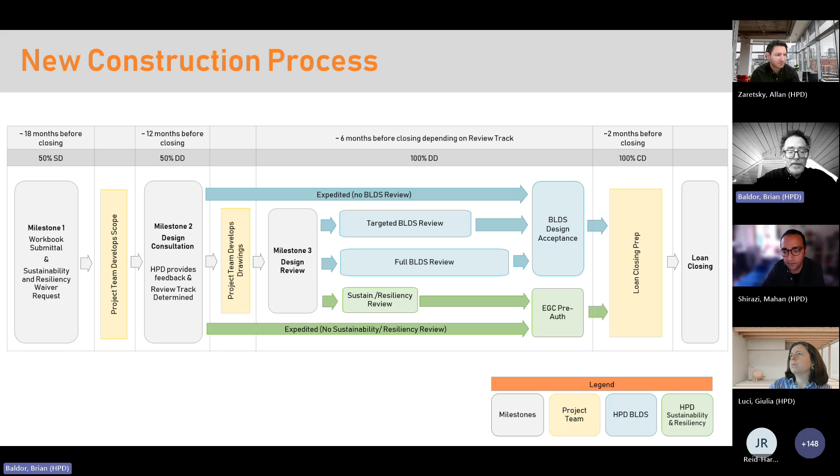The design consultation, again, as I mentioned, is around 12 months before closing - that's when you would be submitting for the design consultation. The submissions use a separate design consultation checklist. We do require a consultation. That process does also involve pre-ULURP.

So just wanted to flag that if your project happens to be on city-owned property and is doing ULURP, it may be a little bit earlier. Regardless, it's the same checklist. Then during the consultation, the entire development team would be present.

That is to say, representation from ownership, architecture, engineering if necessary, along with BLDS architecture, engineering, sustainability, resiliency, and of course program. So we look at the project, we talk through it, make sure that the goals are aligned and the project is progressing in a good direction. Then after the design consultation, the document that has been reviewed for the consultation is shared back with all members present.

After which, focusing specifically on BLDS and our design review, there are three possible review tracks. One of them is the design review track, where after the consultation is complete, a separate intake is created.

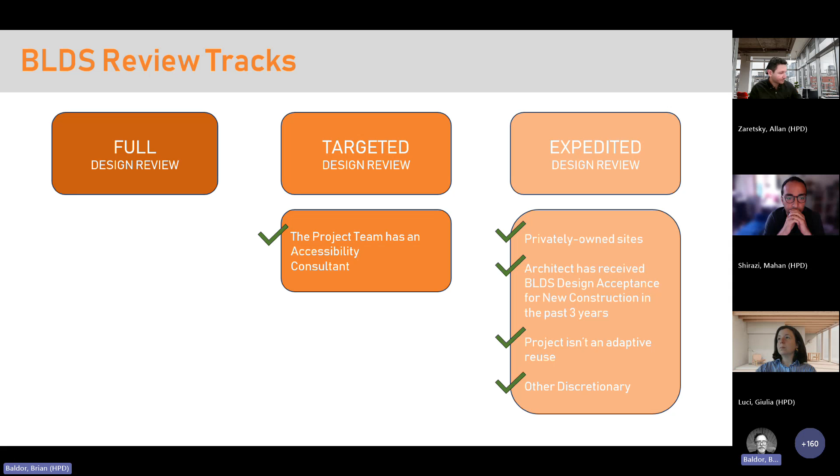Another important tool as part of our updated process is the project summary worksheet. In the past, if you haven't done a project since September, you would be familiar with our PDF summary at the beginning of the documents. We have created an Excel spreadsheet that captures much more of the data about the project. Very useful tool - it includes information that's useful to all of our teams, and we will look at this in more depth in just a moment with some of those teams.

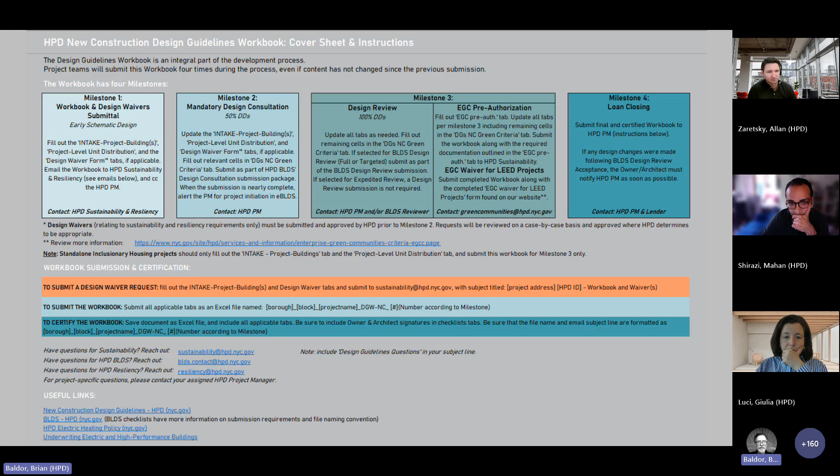I'll turn it over to my colleague Mahan Shirazi to talk about the design requirement updates in this version of the guidelines.

Thank you, Brian. So for those who are familiar with the older version that we published a few years ago, the design requirement aspect of this new guideline is very limited. The scope of the change is quite minimal in terms of the BLDS review. My colleagues at Sustainability and Resiliency will go through the changes in their sections, which are, I think, the majority of the updates. But in terms of design, I'll just say that if we are halfway through May, this will sort of allow a transition period for projects to determine whether they would go through version 1 or 2 of the guidelines.

Presumably, if you're here and working on a project, it's unlikely you'd be supposed to close by June 30, but if it is, then that would be the exemption. Otherwise, projects closing after June 30 will be subject to version 2 of the guidelines.

Maybe one organizational change, an update in the guideline, is that we rearranged the chapters and sections, partly to improve the clarity of the guidelines and also to be aligned and consistent with the preservation design guidelines, which were previously published as well.

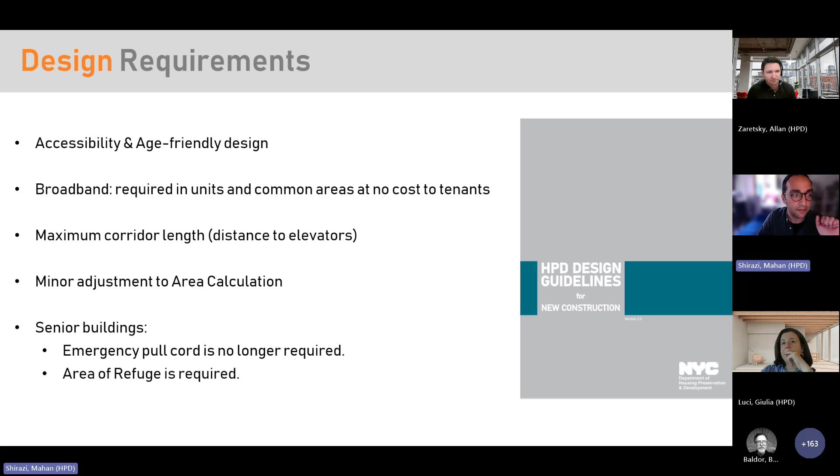Okay, so let's dive into the sustainability requirements. First, a few processes and housekeeping items. As we know, all new construction projects at minimum must certify with the 2020 Enterprise Green Communities with New York City overlay, or LEED v4 Gold. This is not new, but we updated the HPD Green Building Certification outline on our Enterprise Green Communities webpage, including updated Green Building Certification instructions, the EGC pre-authorization process, and very important, a revamped version of the EGC pre-authorization form, which is now located in the new Design Guidelines workbook and not available as a standalone form anymore.

Also, Enterprise released the newest version of New York City overlay, version 2.0, which aligns with our newest design guidelines. So all first-time EGC pre-built submissions as of January 1st must comply with this 2.0 version.

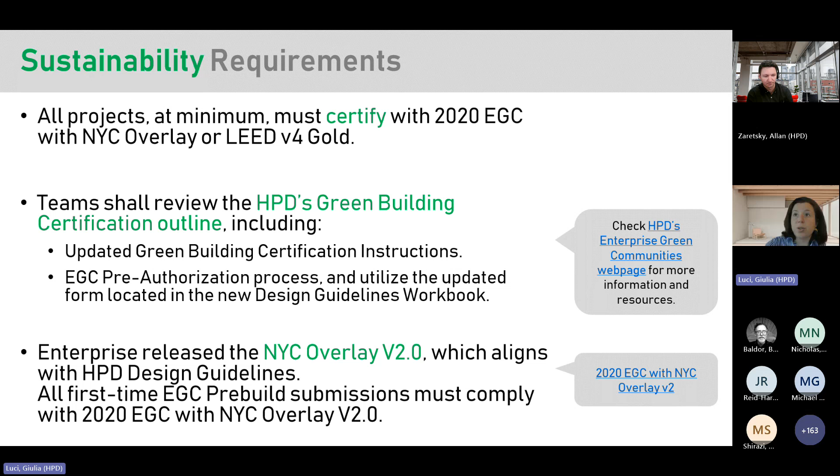Okay, the newest design guideline includes some key sustainability requirements, which I would like to focus on. I'd also like to emphasize the items that we typically look for the most during design consultations and reviews.

In new construction, as we know, we're looking for all electric buildings. So high efficiency electric heating, cooling, obviously electric domestic hot water, and appliances, including dryers and cooking appliances. This is a fundamental requirement of our set of requirements. However, we do allow design waivers for projects which encounter challenges with this sort of compliance.

Also, there are limitations on the use of electric resistance space heating, as it is highly inefficient and expensive to operate. So for context, in our retrofit projects we're pushing for conversion of electric resistance to efficient heat pumps wherever possible. That's why we are also limiting it in new construction.

So electric resistance backup is generally not permitted, including when used as auxiliary and integrated within the PTHPs. Electric resistance can be used in some back of house spaces where other systems would be impractical, but with set limitations on capacities, both for enclosed space and overall in the building.

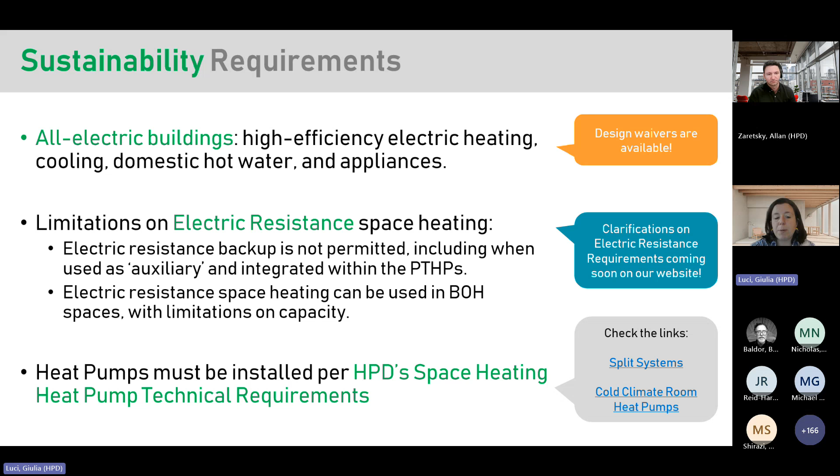And finally, on the HVAC systems, a note about tenant-paid electric space heating and domestic hot water, which are generally not allowed, or not allowed in most cases, and must meet HPD electric heating policies.

We understand that with heat pumps, the split between heating and cooling for building purposes can be challenging. That is why we also recommend owners consider covering cooling costs and take advantage of utility allowances. This and more is better detailed in our underwriting electric and high performance buildings webpage, which I want to highlight and recommend checking out.

Okay, so there are requirements for electric vehicle charging stations for all projects, with both exterior parking lots and/or garages. And also for those, we do allow design waivers.

And finally, a note on solar. As of July 1st, our solar-where-feasible process or program is no longer required for new construction projects. This is because affordable housing will be subject to local law 92 and 94, the solar and green roof local laws, and DOB, as of November of this year, won't accept HPD exemption letters anymore. So all projects, including affordable housing, will have to comply with local law 92 and 94 by either installing solar or a green roof in their sustainable roofing zone.

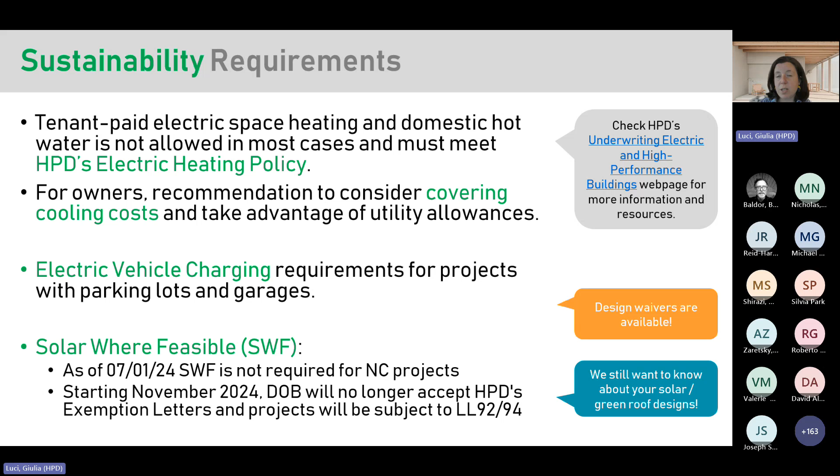We still want to know about your solar and green roof designs, so that is still going to be a conversation we have during our design consultations.

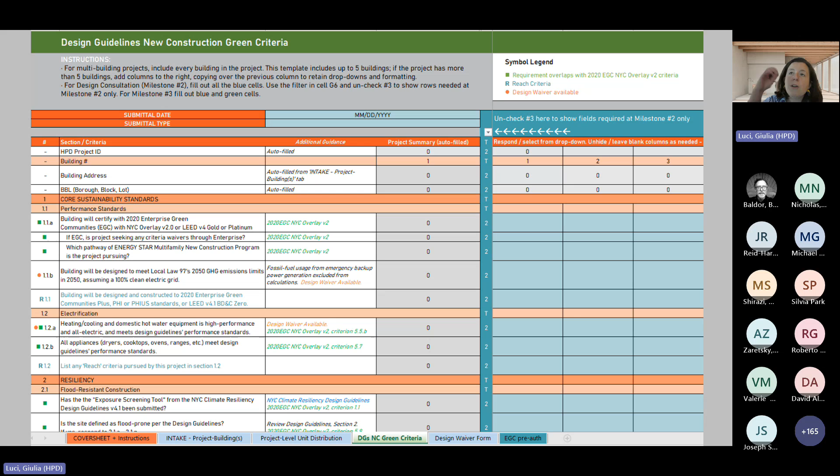Okay, I'd like now to take a closer look at our new workbook, which, as a reminder, shall be submitted and updated throughout the process for each milestone. Particularly, I'd like to go over the design guidelines new construction green criteria tab, or the green criteria tab, shown here, which is organized as a checklist to outline all the sustainability and resiliency requirements from the guidelines. Let's go over it quickly.

At the top, there are instructions on how to fill out the sheet. It's very important to go over this before starting to fill it out, so please do. There's also a symbol legend which will help you understand various inputs throughout this workbook, such as design waivers, alignment with EGC, and the REACH criteria.

As I said, the sheet is organized by criteria, and each line item is numbered consistently with the design guidelines manual, so we include those numbers in the first column. The additional guidance column should also be checked for additional notes and full guidance.

Overall, the information in this workbook shall be entered by building, per building, not per project, so mostly at the building level. Each building in the project will have its own column to be filled out. Here we only see three, but there are more in the real workbook. A project level summary will auto-populate in the project summary column in gray, like the fourth column.

And finally, as I said, information in the workbook is not to be entered all at once. We are preparing for milestone 2, and to help with that, you can filter the line items you'll have to fill out for milestone 2 through that arrow in the dark blue column.

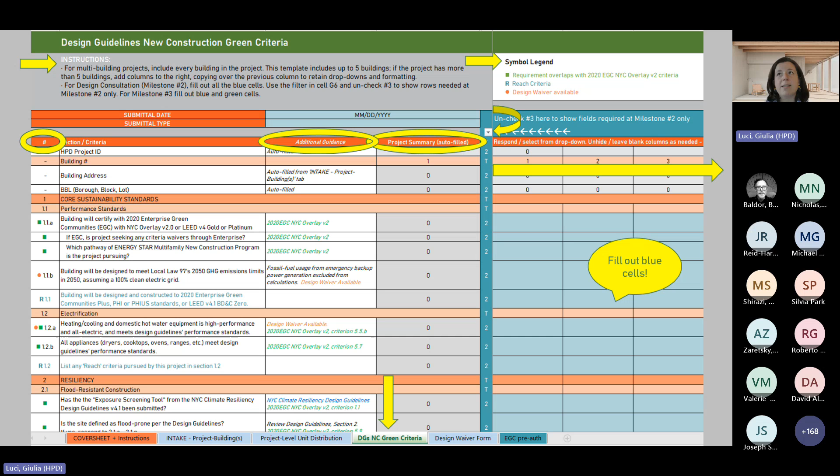Last but not least, a reminder that you only need to fill out blue cells throughout. Everything else is locked for a reason.

Okay, there are a couple more tabs in the workbook which I wanted to highlight. The design waiver form, the one on the left, shall be filled out and submitted as early as possible in the process whenever a project is seeking a waiver to waive certain requirements. And then on the right, there is the EGC pre-authorization form.

As I said before, this is now located in the workbook and is not available as a standalone form anymore. It is partially automatically populated from the other tabs of the workbook, but teams will still have to enter some of the information. Teams that have been using the old project summary from the beginning of their projects and now need to submit EGC pre-authorization will have to download the new workbook and just use the form from here, because it's not available anymore as a standalone.

Okay, and I think I'll pass it now to the resiliency team.

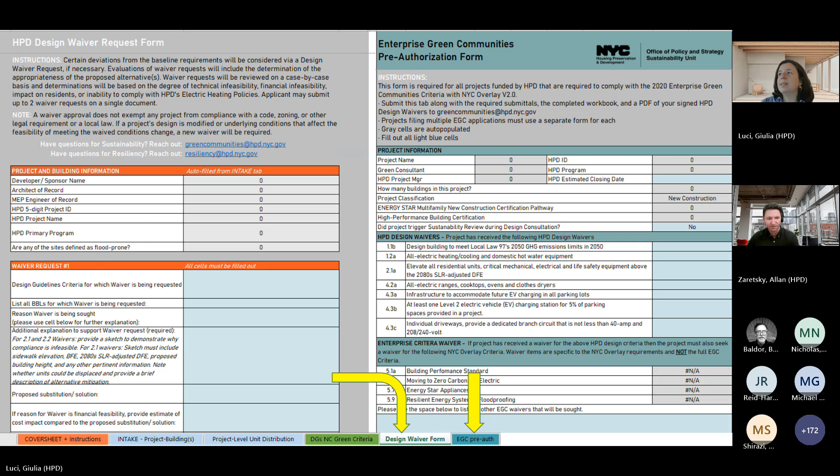Allan, you're muted. Oh, thank you, Giulia. Good afternoon, everybody.

HPD's design guidelines for new construction establish new resiliency requirements based on best practices and climate projections published in the New York City Climate Resiliency Design Guidelines. The City of New York has maintained these climate resiliency design guidelines for several years now as a design reference. They are intended as design guidelines for city capital projects to incorporate forward-looking climate change data on heat, precipitation, and sea level rise across a project's full useful life.

They're intended to guide the design process from project scoping and planning through to final design for all new construction and substantial improvements of city facilities. And following passage of Local Law 41 in 2021, they will also require that by 2027, all city capital projects, including most financed by HPD, meet CRDG requirements that will certify their preparedness for extreme weather threats.

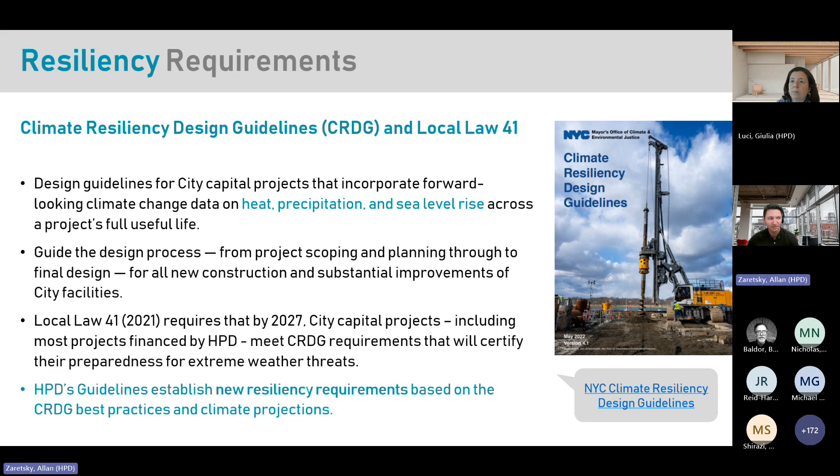So HPD's own design guidelines similarly include requirements to address sites that are prone to coastal and stormwater flooding, as well as extreme heat. I will run through some of these key requirements in the next few slides.

So the HPD guidelines require projects that are determined to be flood prone to coastal flooding over their full useful life to incorporate additional resiliency features beyond what building code may currently require. To the left, you can see the extent of the 2080s future projected floodplain. In order to screen for these coastal flooding and sea level rise risks, HPD utilizes the New York City Flood Hazard Mapper.

Projects that are determined to be at risk of current or future flooding are required to elevate residential units, building egress, and critical residential serving building systems to the 2080s sea level rise adjusted design flood elevation.

This sea level rise adjusted design flood elevation, or the SLR adjusted DFE, references the New York City Panel on Climate Change's mid-range projections and aligns with the new building expected useful life criteria as they're published in the Climate Resiliency Design Guidelines. My colleague Michael has dropped the link in the chat. And the HPD guidelines do likewise permit design waivers for some provisions where determined to be appropriate.

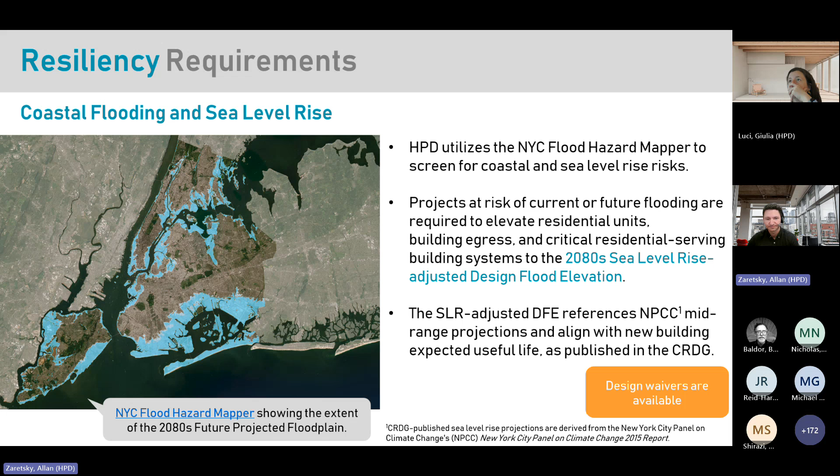The HPD guidelines also establish requirements for sites determined to be vulnerable to stormwater flooding over their full useful life. HPD utilizes the New York City Department of Environmental Protection's stormwater flood maps released in 2021 in order to screen for stormwater flood risks. To the left, you can see the extent of the 2080s extreme stormwater flood area.

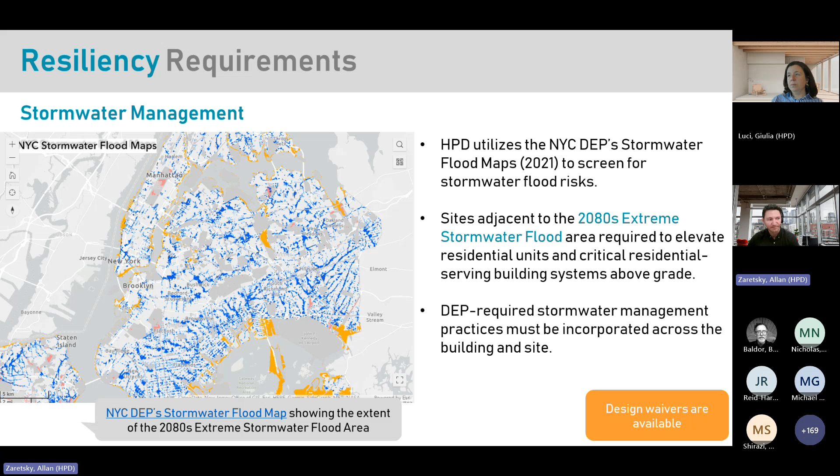Sites that are adjacent to the 2080s extreme stormwater flood area are required to elevate residential units and critical residential serving building systems above grade. The design guidelines also require that applicants demonstrate incorporation of DEP required stormwater management practices across the building and site, as required by the city's unified stormwater rule. Likewise, design waivers are available where determined to be appropriate.

And finally, the HPD guidelines require projects to meet certain design requirements to reduce the building's contribution to area or neighborhood urban heat island effect, account for increasing temperatures, and ensure occupant thermal safety. HPD utilizes the Department of Health and Mental Hygiene's Interactive Heat Vulnerability Index map to identify high heat vulnerability index neighborhoods. These are identified as neighborhood tabulation areas, or NTAs, that have HVI values of 4 or 5.

In particular, projects that are at least 50% senior housing must provide a place of refuge, a community space accessible to all residents, that includes backup power for heating, cooling, lighting, and other critical support functions, as well as adequate backup power generation, in addition to service for critical and emergency loads, to ensure that at least one elevator remains in operation.

Additionally, permanent shaded open space must be provided in high heat risk areas that are not located within a quarter-mile walk distance of dedicated and accessible public space. And this extends to both projects that are at least 50% senior and/or other low mobility populations.

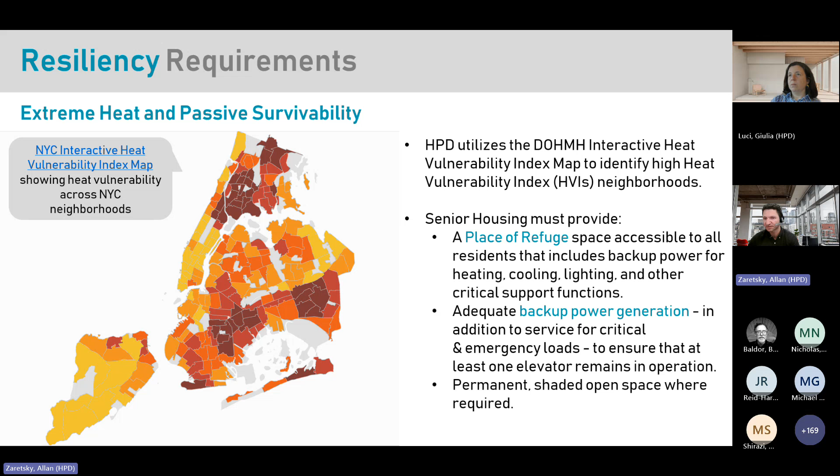So what is next? First and foremost, the design consultations. We're aiming to have productive conversations with all of you to discuss challenges from your projects, respond to questions, etc. Please continue to check out resources and updates on our website. And let's not forget the HPD Green Communities training, which are scheduled to happen soon. Also, we have emails where you can reach us for all your questions throughout the various steps of the process. EGC pre-authorization and solar submission shall go to the Green Communities address. We also have a new sustainability address for sustainability design waivers and questions, and the resiliency address for resiliency design waivers and questions.

We're open to leave some time for questions. We are over time, but we can stick around a little bit more. So feel free to... okay, I think there is a question. From Chien, I don't know if you can unmute yourself. There are some questions already being answered in the chat, but feel free to put more. Chien, I gave you permission to use the microphone if you want to speak out. If there are any other questions, please feel free to put them in the chat or raise your hand. I don't see anything coming through. We'll give this another couple of minutes, and if not, we can all go back to our Friday plans.